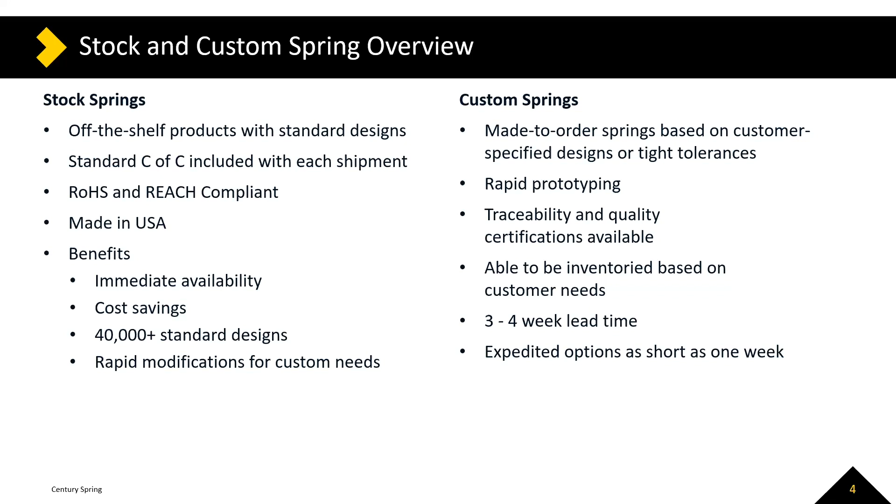Secondly would be an extension spring. We've got torsion springs, tapered or conical springs, die springs, disc springs, urethane springs, and constant force springs.

Just to touch real quick, a tapered spring would be great if you have a confined space and you're looking to deflect that part to, in some cases, solid length. Die springs are really for heavier loads and lower deflections, often in punch presses. A lot of the die springs we sell are for MRO purposes.

Disc springs as well are going to be in a confined space. These are designed for higher loads, lower deflection, and disc springs can be stacked in a variety of ways to achieve the load and deflection your application requires.

Urethane - primarily off-the-shelf parts we offer here are for like a bushing type application. And then lastly, constant force is depicted. Constant force is, I guess in layman's terms, a great point of purchase spring.

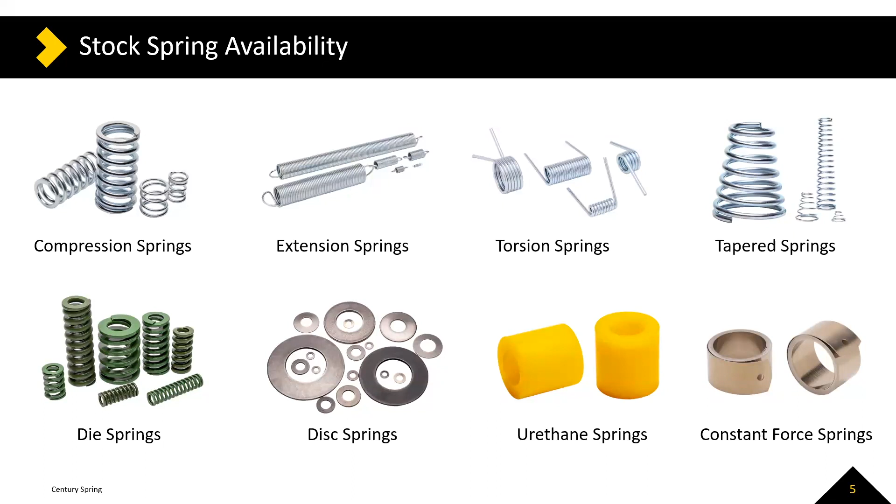For compression springs, we'll list a coil count. Some of the attributes do vary by category, but searching online with our search function, where you can enter a range of values, is a great place to pull all potential stock candidates, as well as the catalog.

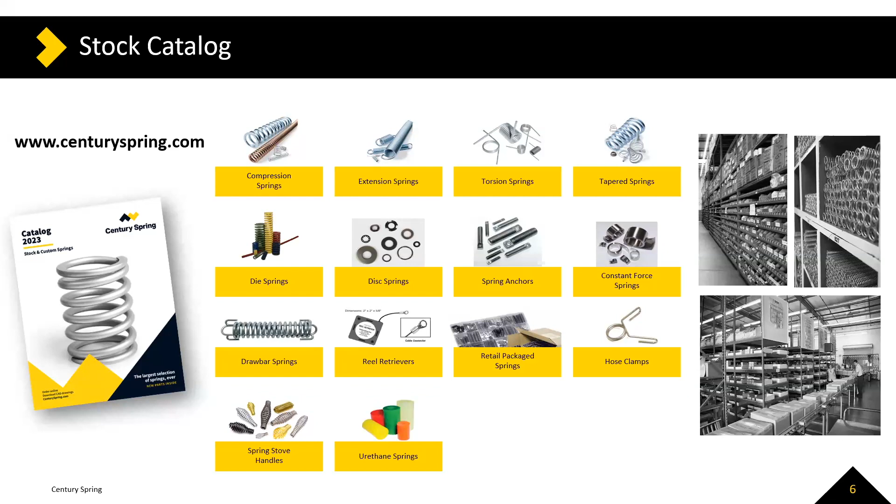So some materials for stock springs. Off the shelf, we specialize in a lot of the 300 series, primarily 302, 304, and 316. We do high carbon steel, music wire, hard drawn, oil tempered, and then a limited number of beryllium copper and phosphor bronze - those are more or less fewer demands for parts off the shelf. It really is the 300 series and the steel components or the steel material that people tend to pull.

You'll see below this picture is just a little reference of how we inventory our raw materials, which is a fantastic part of the stock business. If we're out of stock or running low, having all the raw material on hand really enables us to quick turn and get parts back on the shelf.

As a stock spring company, our goal is to ship 95% on time, and by on time I mean same or next day. And when you think about 40,000 parts, that's a lot of inventory to keep on hand for that on-demand requirement.

Off the shelf, some of the finishes that our parts come in are zinc, gold irridite or gold zinc, black oxide, an oil finish and dry film lube, also phosphate. And then not off the shelf finishes would be nickel, gold, silver, and passivation and an electro polish. Those are secondary processes you would have to elect, or we offer a lot charge where we can add those.

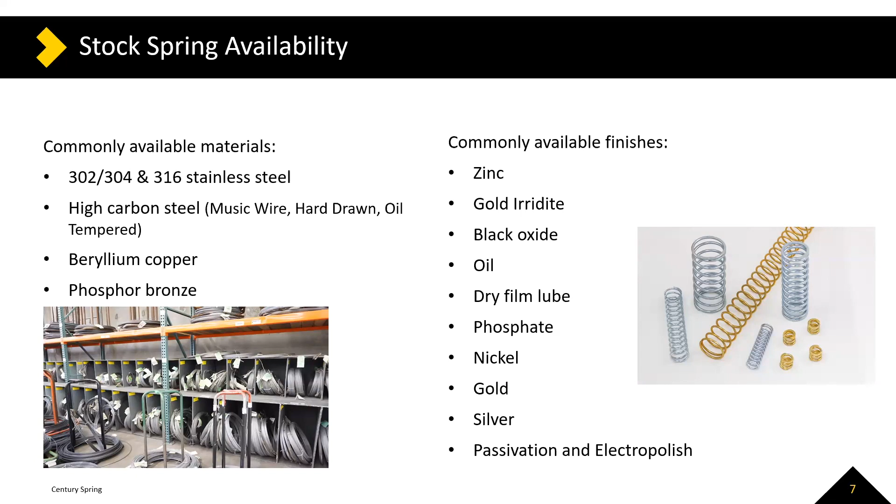Some common questions that we come across when people are looking for a stock spring.

This is quite common: can I use a stock spring if I have a very tight tolerance for my application? Our stock parts off the shelf are certified to SMI commercial tolerances. Oftentimes people think they need a tighter tolerance than they actually do, so really testing that part with a range of samples is a great place to start to see if the stock part will fulfill the need. If you do need a tighter tolerance, that's a quick modification and we can turn that over to the custom side.

How do I know how strong a spring is? The strength of a spring is measured by its K, or spring rate, and this is often translated to pounds force per inch. As an example, if you have a 5-inch spring with a 2-pound spring rate, for every 2 pounds of force applied, that 5-inch spring will deflect 1 inch.

Next, is it safe to compress stock springs to solid height? In some cases, yes, and in some cases, it's not. Depending on the spring design and the suggested safe travel, it may enable the spring to go to solid length where all the coils are touching one another. But in most cases, for stock parts, you'll find that there is a safe load and a safe travel value. If you keep within that range and don't exceed that safe deflection value, we would certify more or less 100,000 cycles for our stock parts.

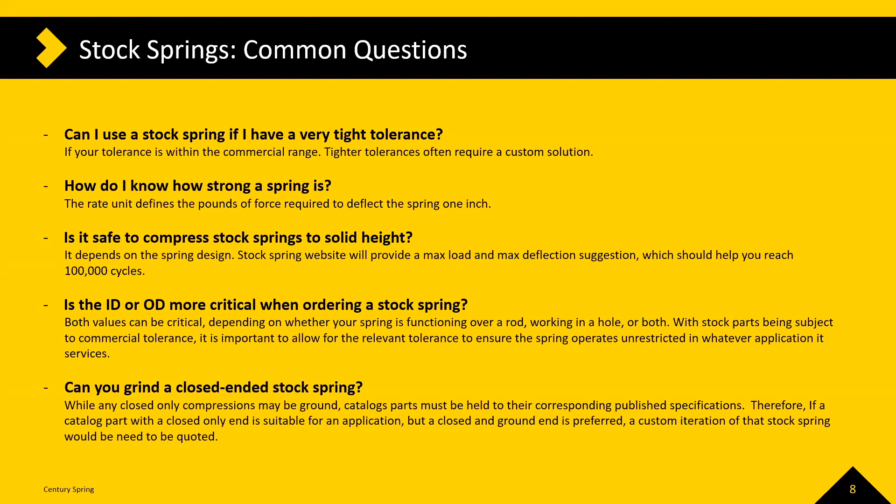Some recent stock spring cases that satisfied great customer demand: we had a baby booster seat manufacturer that was not doing business with us, and they had been procuring a custom part from an alternate supplier but ran into a supply chain issue. They were unable to procure springs in time to finish the assembly on their baby seats, and so they contacted us.

We provided them a range of samples, and within days we identified a great stock candidate. The reason we were able to turn this around so quickly is because we had ample raw material. It was a part we had 50 to 100 pieces on the shelf of, and with the raw material available, we were able to turn parts around and deliver on time so they could finish their assembly and get that product out to market.

Secondly, there was an aerospace satellite application. When you think about aerospace, you often think about traceability, special materials, etc. But in this case, they were able to use any component made in USA, and tolerances weren't a big issue. They had a design change amidst their deployment schedule and were unable to procure a custom spring in time. So they came to us. We were able to, through sampling, identify a perfect candidate for their redesign. And again, having that material on hand, we were able to quickly produce, ship and deliver in time.

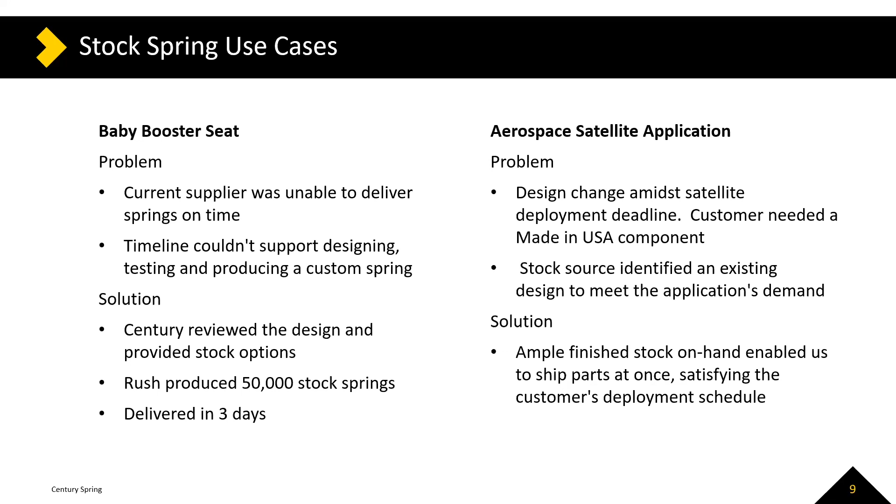And so now I'm going to turn this presentation over to Ida, who's going to talk a little bit more about custom design, and how stock parts can transition to custom. So here's Ida.

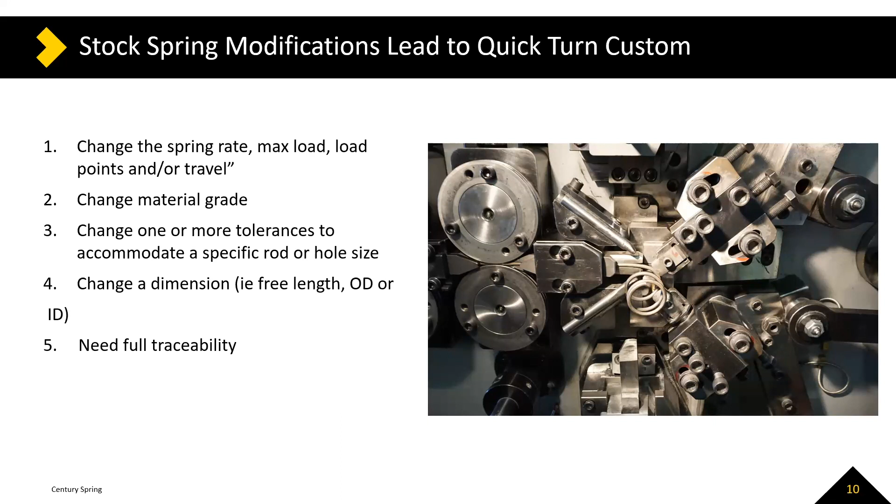So simply, if you have a print, or if you have tighter, meaning precision, tolerances, if you have a complicated design, or if you need some exotic or specialty materials, we can manufacture these as custom.

Sometimes you have a print, which is great, but sometimes this is actually our favorite scenario: the customer knows all they know is that they need a spring and they don't know where to start. That's a great place to start with us, involve our engineering team. We can help you with the design and make sure that it is manufacturable and that we're offering you the quickest lead time.

Sometimes customers have a sample spring and they don't know what the material is. You can send us a sample spring or springs. We have a spectrometer here. We can analyze the material and understand what it is. We have, of course, spring testers. We test the spring to understand what the rate is, and we can duplicate that spring as a custom order.

Here's a short video of a spring being manufactured.

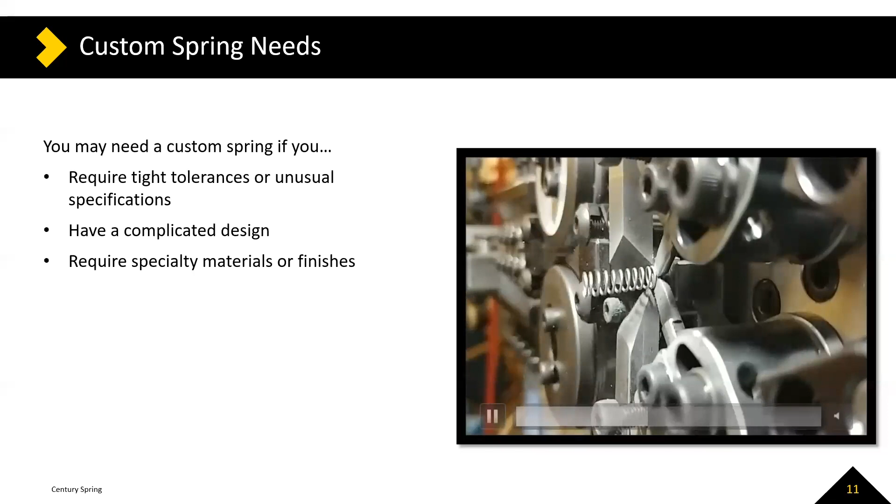Here's a very short, simplified overview of the spring manufacturing process. The first step is, of course, the coiling step. What we do here at Century Spring is all cold winding, meaning we do not add any type of heat to form the material. The majority of the cost, labor, setup time goes into setting up the machine for coiling. We have the CNC machines, we have the mechanical coilers, and to give you an idea, for a very simple compression spring, something that's not too long and doesn't have tight tolerances, it's just an easy compression spring.

We need at least one to two hours of setup. The run speeds are usually pretty fast. The next step would be stress relieving. Stress relieving in spring manufacturing is a standard part of the process, just because, as I mentioned, it's cold coiling. We form the metal by applying force. When you do that, you add stress to the material.

So it has to go through stress relieving so we can release that stress. That is done in-house for our stock parts or some of our custom parts. We have the inline and the box ovens that are all, of course, calibrated, and they have heat charts. We can offer you, for custom orders, a copy of the heat chart so you can see the time and the temperature.

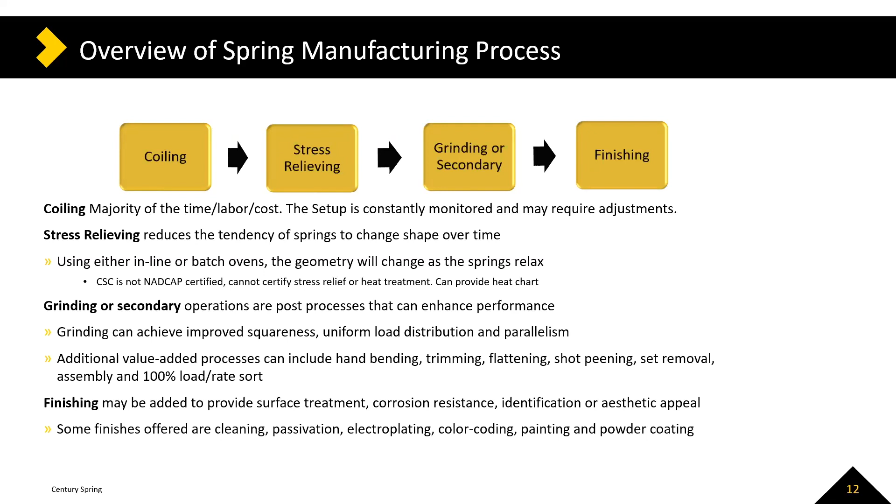So here's a spring design process. The first step would be defining the problem. What is it that we're trying to do here? Based on that, we decide what type of spring we need. Once we've decided the type of spring, we need to know the environment and the life cycle expected from the spring.

Based on all this information, we select the material. We design to optimize. We check our design, and if there are load points, we check the stresses. Sometimes when we check the stress levels, we have to go back and change some of the parameters to reduce the stresses, sometimes even go back to change the material.

So when we work with our customers, meaning our engineering works with some of your engineers, we do this back and forth sometimes for a few weeks to get to that optimal design. We use the advanced spring design software that is used by most spring manufacturers, and we can even send you screenshots of the design sheet for your approval.

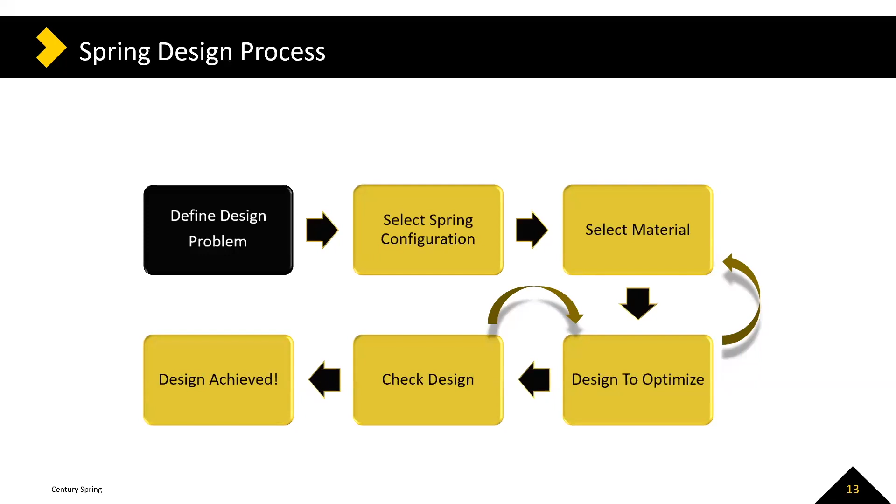So as I mentioned, the first step would be understanding what is it that we are trying to do. Are we trying to just apply a force? Are we trying to control a displacement or a position? If you're trying to accelerate or decelerate an object, or just simply trying to occupy a space.

Once we know that, we have to see what the critical functional characteristics are. Is it the rate that is mostly critical? Do we have two load points, meaning the installed length and the cycling load point that is critical? Do we have constraints on the space, meaning do we have a max solid height requirement? Do we have a shaft? Do we have a hole? You need to make sure the spring fits into.

What is the life that is expected from the spring? As James already mentioned, the minimum we design to is 100,000 cycles, of course theoretical values. Everything we do at the design stage is reviewing the stresses and reviewing the graphs, but we do not manufacture and design to less than 100,000 cycles. But if you need 10 million cycles, that needs to be communicated with us to make sure that is actually happening.

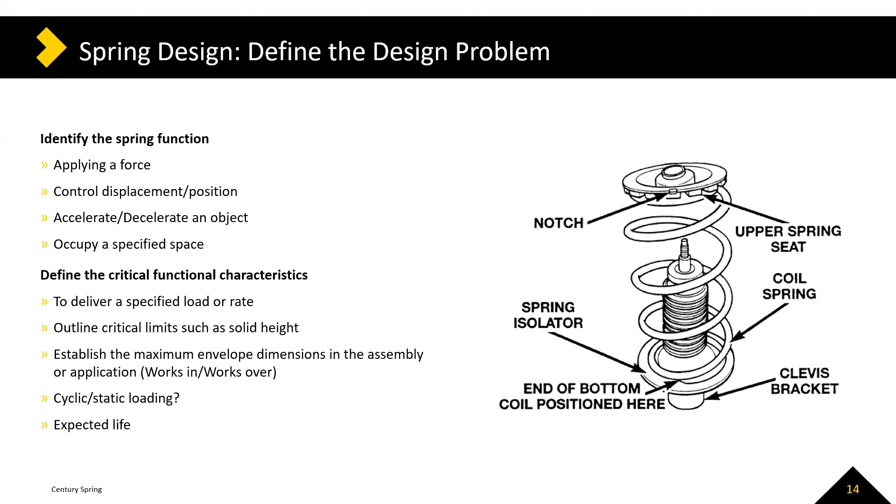At the ends, the hook orientation can be defined. They can have machine hooks, which is pretty standard, full loops, double full loops, side hooks, extended hooks. You can specify the hook orientation - I want them to be in line, or I want them to be 90 degrees to each other. You can specify the gap size for the hook. All of this, of course, can be done as a custom order.

Torsion springs rotate at a constant rate. They can have open or closed wound - actually all springs can have open or closed wound, and that pretty much means whether there's a gap between the coils or not. And of course, torsion springs can come with a variety of leg configurations.

The angle between the arms usually, per SMI commercial standard, is plus or minus 10 degrees. We can manufacture to tighter tolerances like 5 degrees, and in some cases we've done even tighter than 5 degrees. One other product that we do offer is double torsion springs, which is not mentioned here.

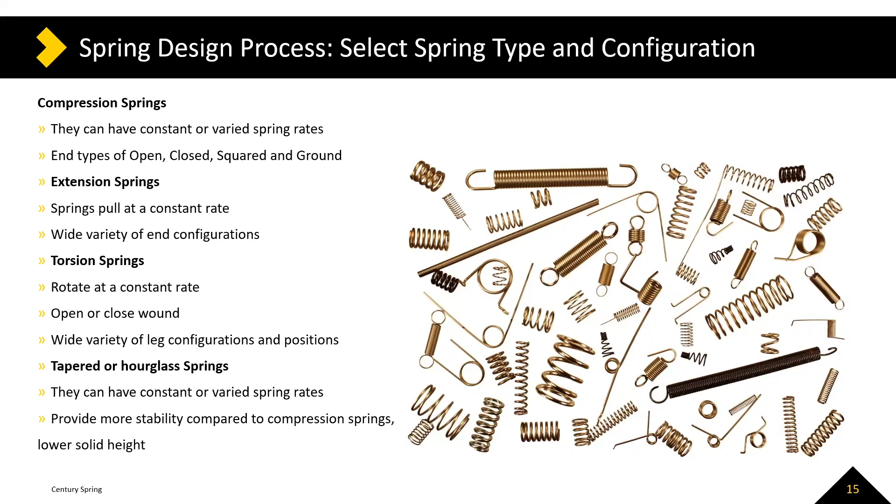Next would be 302, 304 stainless, 316 stainless. 316 is the food or medical grade stainless. It's softer than the rest of the materials here, but has great corrosion resistant properties.

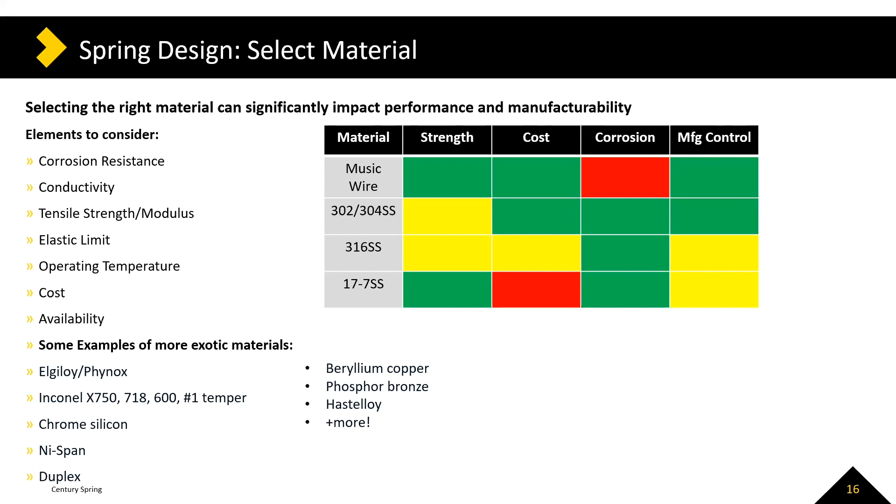The reason for it: let's say on a compression spring, the last coils at the ends are called dead coils, and the coils in the middle are called active coils. So when we compress a spring, we need enough deflection so the active coils start moving. Similarly, if we compress the spring too close to the solid height, now the dead coils start moving too, so everything is moving. The rates can go out, the measurements won't be accurate. So we try to avoid specifying load points less than 15% and higher than 85% deflection.

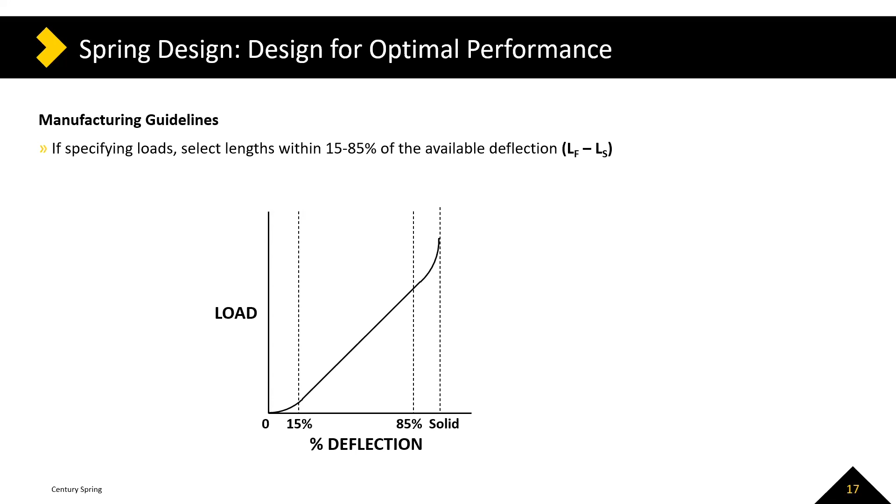Obviously, we have to try avoiding high stress designs because that directly affects the life cycle of your spring. If a spring is overstressed, usually the term we use is it will take a set, which simply means it gets shorter. There are ways around it in the spring manufacturing industry to reduce that stress.

One of them is presetting. What presetting is, simply, manufacturers make a compression spring longer, and they preset it, meaning compress it to solid height or to a specific load point at least 3 times, to take the set out. As you can imagine, it's extra secondary work, so it definitely affects the pricing. We try to avoid it if possible, especially for really large quantity orders, because it can drastically increase cost. But it's important to know not all springs can be preset - it really depends on how overstressed the spring is. If it's extremely overstressed, presetting won't work.

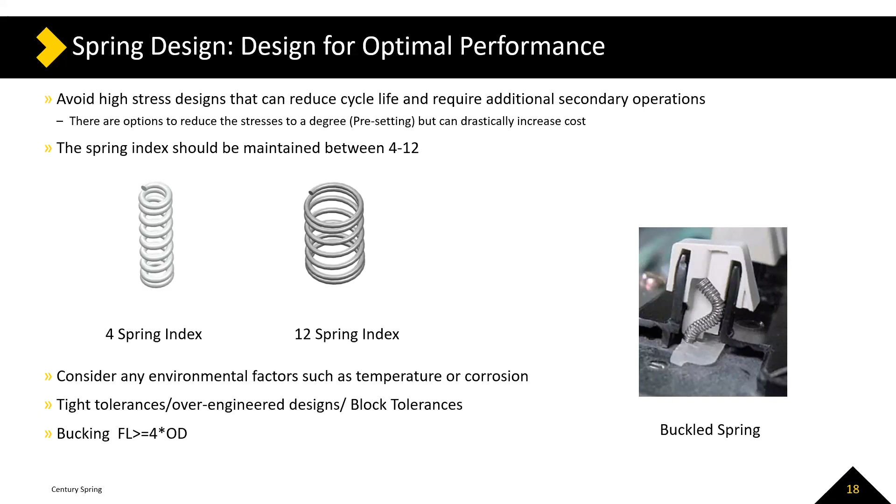Squareness tighter than 3 degrees. 5 to 3 degrees is pretty standard in spring manufacturing. We've done tighter than 3 degrees - we've done 2, we've done 1.5. But again, we have to know if it's really, really needed, because anything tighter than 2 degrees is extremely hard to manufacture. And of course, larger than 5 degrees, if you look at the spring, you can see that it's kind of tilted.

Tool marks - I would say you can't avoid them. You can definitely reduce and minimize them. So when designing a spring for you, we have to know how critical the tool marks are for you. There's always a cutoff mark, right? When we cut the spring at the very last coil, you see the tool mark. When we bend, especially tight bends on torsion springs, you can see the tool mark. So it's important to know how critical this is, because we can do things to reduce and minimize tool marks.

Extremely fine surface roughness - for closed and ground compression springs, sometimes on the prints we see call-outs for very fine surface roughness. It's doable, we do it all the time, but it's important to know that if it's not needed, it should be avoided, because a regular compression spring with closed and ground ends should go through one process of grinding, while a spring with a very fine surface roughness requirement should go through multiple grinding operations. And as you can imagine, that can increase cost and lead time.

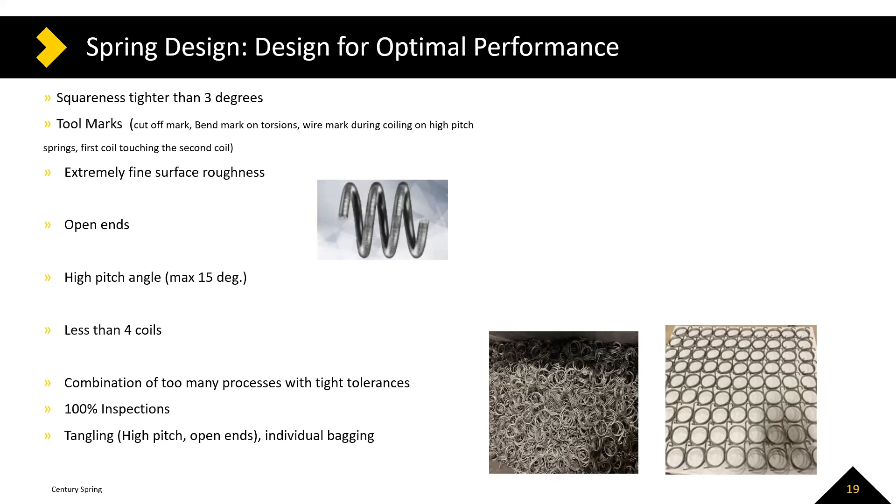Here are very general tips on tolerancing. But again, tolerancing all depends on the spring design, so these are just very high level suggestions.

For the cutoff burr, leave 10% of the wire diameter. If you have two loads that need to be toleranced, the rate and the free length should be reference values. We can't really tolerance everything, we have to understand what is critical and what can be a reference value. If the rate is toleranced, only one load or the free length can also be toleranced. Coil counts, unless the spring should be manufactured to physical dimensions only, for the most part should be a reference value.

And of course, try to avoid tolerance stack up. Some of the typical tolerances for the wire diameter, really this one is out of our control. We do not make changes to the wire size. We buy the raw material, and all the material we purchase is from our approved suppliers, per ASTM and AMS standards.

Body diameter, which is the OD or mean diameter, can be, depending on the design of the spring, 3 to 10%. Free length, again depending on how long the spring is, can be 2 to 5%. Loads and rates, plus or minus 10%, we can manufacture as custom, as tight as 5%, and sometimes even tighter than that.

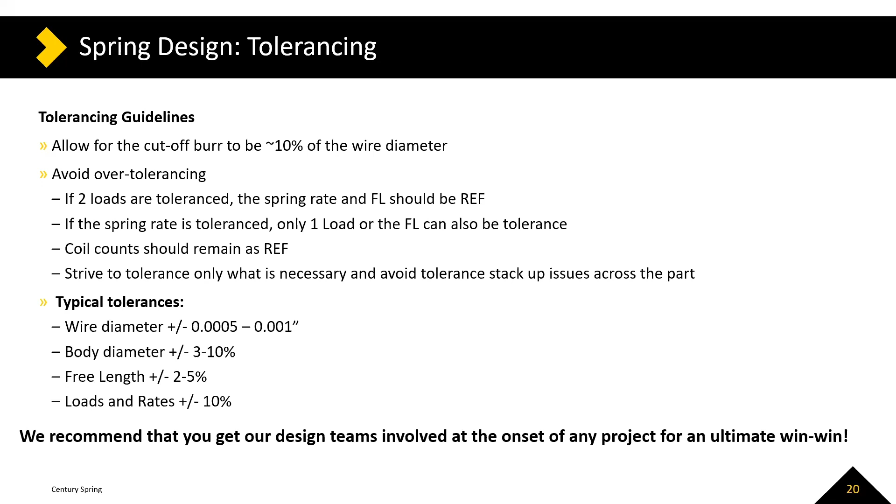Because there are cases that we even receive a print and it says the wire needed is 0.162. What we have in stock is 0.16. Changing that wire size won't really change the design that much. If we discuss that in advance, we can offer you custom manufactured parts maybe in 10 days, whereas if you have to go buy 0.162, it may take 6 to 8 weeks. So it's very important to involve us from day one, so we ensure manufacturability and the best lead time.

Why is my design overstressed, and what does it actually mean for manufacturing? Well, the spring being overstressed depends on so many factors. I already mentioned there are ways to reduce the stress, like presetting and shot peening, but it really is hard to just say why a spring is overstressed without seeing the design. And what it means for manufacturing, by all means we can manufacture a spring that is overstressed, it's just not going to be the life cycle you expect from it.

Will my spring buckle after preset? Well, buckling and presetting are two different things, we already discussed both. So the spring that buckles, when we preset it, it buckles again. So it's not a good scenario.

Why does my number of active coils need to be treated as reference? I actually just discussed this. We need to have enough room. So the things that control spring rate in a compression spring are the wire size, the OD or the mean diameter, or the ID, depending on what's critical, and the number of coils. We can't really change the wire size once we pick it, and we have a little bit of tolerance on the OD. So the only parameter that we really can work with mostly is the number of coils to get the rates in.

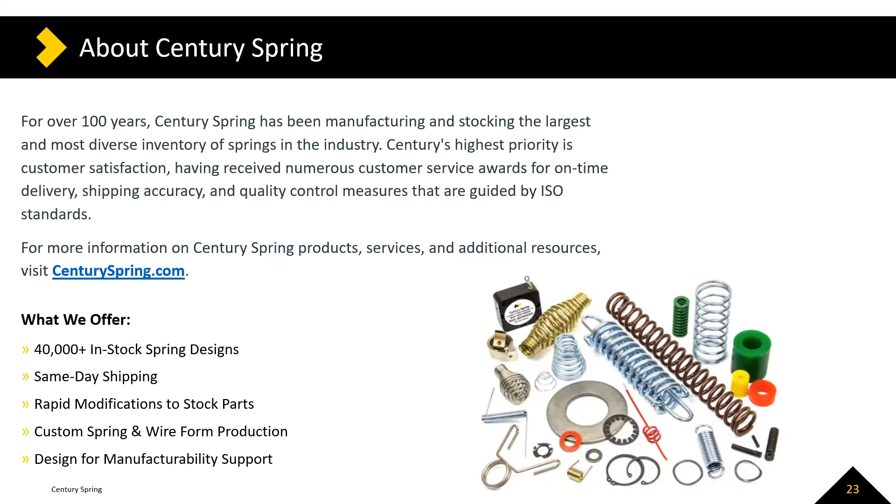Just as a quick wrap up, Century Spring is one of the largest suppliers of stock springs worldwide. They offer over 40,000 spring designs in stock, which translates to millions of parts available for same-day shipping. Both Century Spring and Century's parent company, MW Components, offer custom spring manufacturing as well. MW Components offers a wide range of manufacturing for other metal parts, including fasteners, metal bellows, shims, and more. For more information on Century Spring, please go to centuryspring.com, or go to mwcomponents.com for more information on MW.